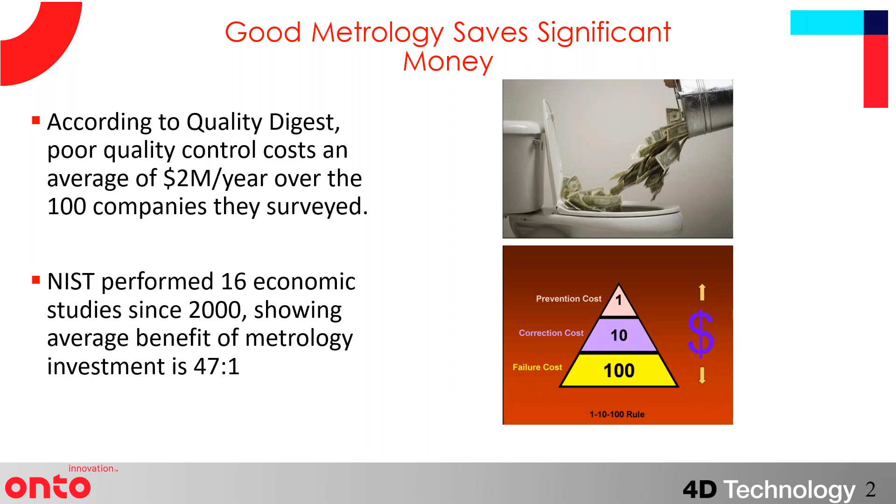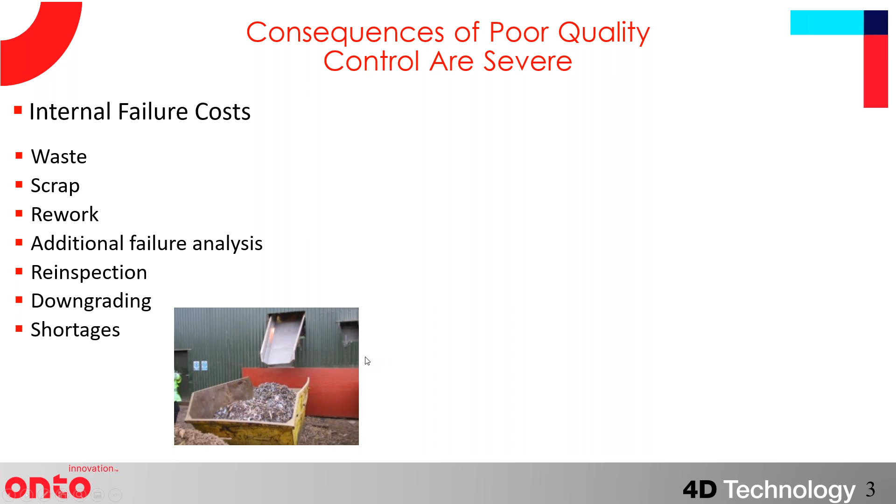So what are those costs? They fall into two main categories. One is internal failure costs, so the cost of waste, scrap, rework, failure analysis, etc., that all will slow down production, will create problems internally. But probably the more severe costs are what they call external failure costs. And those are ones associated with field failures.

So having to do repairs and service of parts under warranty, handling customer complaints or failure of customers to accept parts, travel and return time and meetings associated with discussions of failures, and ultimately maybe the most important, which is customer perception, where, if you get a bad reputation or fail to handle issues in a timely manner, that can have long-term business consequences.

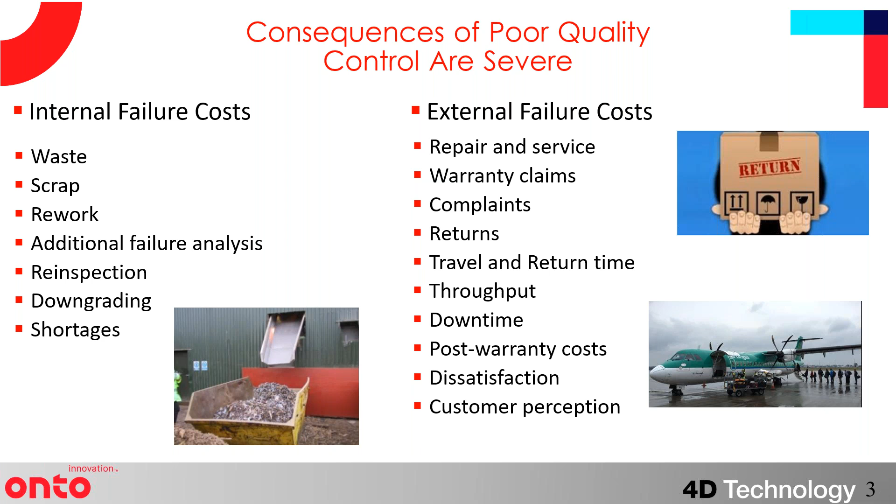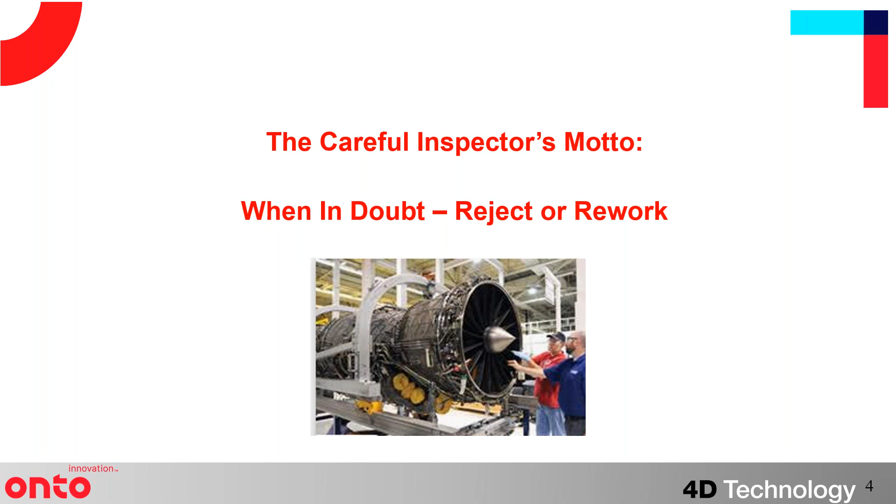And one of the challenges in aviation is, inspection and metrology is really critical. Almost every inspector out there, if there's any doubt whether a part should pass or fail, he will always reject it or put it in the rework bin, because the cost of failure is simply too high. I've heard many times from our customers and from inspectors that they think about every engine they work on and every piece of an aircraft and think, what if my mother got on that aircraft and it needs to be safe? And so that actually leads to aviation having among the highest failure rates of any precision machining industry.

And traditional techniques are just no longer sufficient to control quality. So, surprisingly, there's still a large number of calibrated eyeballs and fingernails out there that are doing measurements, essentially with one person and their judgment, but they are operator dependent and, of course, non-quantitative, non-gauge capable results. The next level of sophistication, and this is probably more common now than anything, is to use replication and then either a 2D profiler or an optical comparator to look at a cross section of a given defect or part.

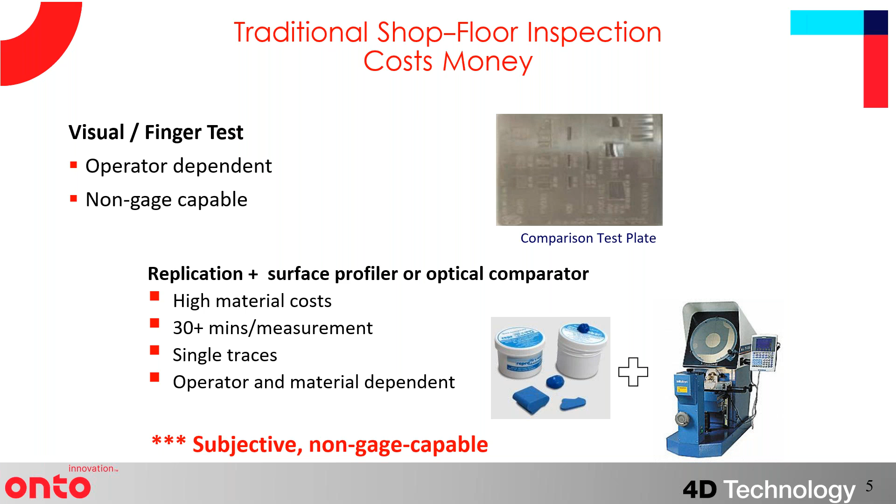The replication material is expensive. It's a time-consuming method because the replication material has to dry, be scribed, go to another instrument. But more importantly, it still lacks a lot of quantification. Did you really get the deepest part of the pit? Did the material really penetrate all of the way? And so these are very subjective, non-gauge capable methods.

On the other end of the spectrum are lab-based measurement systems. And that might be something like a 3D microscope or a high-quality stylus system. But these systems are expensive. They can't handle large aviation parts. So again, you're often relegated to needing replication.

They're difficult to use many times. And if they're in a metrology lab, that lab generally is quite busy. And it may be days before quantitative measurements come back to the shop floor.

And so our goal, and we've been working with the various people in aviation, and actually partnered in the development of this product line with General Electric, Rolls-Royce, Pratt, and others, is to bring accurate 3D surface measurements to the part on the shop floor and make quantifying a defect just as easy as taking a picture with a cell phone or a mobile. So here you can see some different examples of that.

Being an optical technique, you can actually use fold mirrors, as you see in the center of the field of view, to look inside fir tree roots. You can measure large cowlings. You can measure inside pipes or outside shafts.

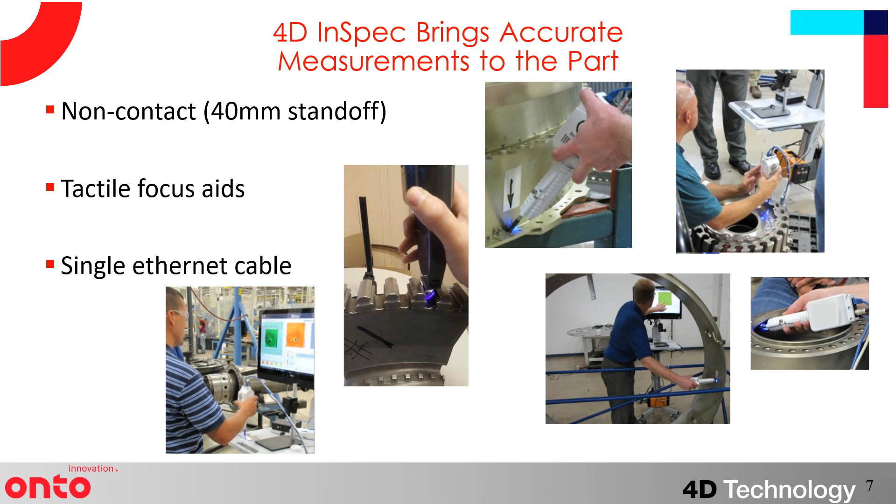Talk briefly about specifications that we came up with. We currently have two models of our handheld surface gauge. One is the standard 4D InSpec with an 8mm by 8mm field of view, 2.5 millimeters vertical range, and 3 micrometers vertical resolution. The standoff distance from a part is fixed, so the instrument will always be 35 millimeters away, or if you use a fold mirror, that combined distance between the instrument and the part will still be 35 millimeters.

The XL has nearly twice the field of view, but more than 3 times the vertical range, and just about twice the vertical resolution. So here we're talking about 8 micrometers vertical resolution, standoff distance considerably larger, but still very tight lateral sampling for both instruments. So more than sufficient to be able to quantify defects which are visually or tactilely observable.

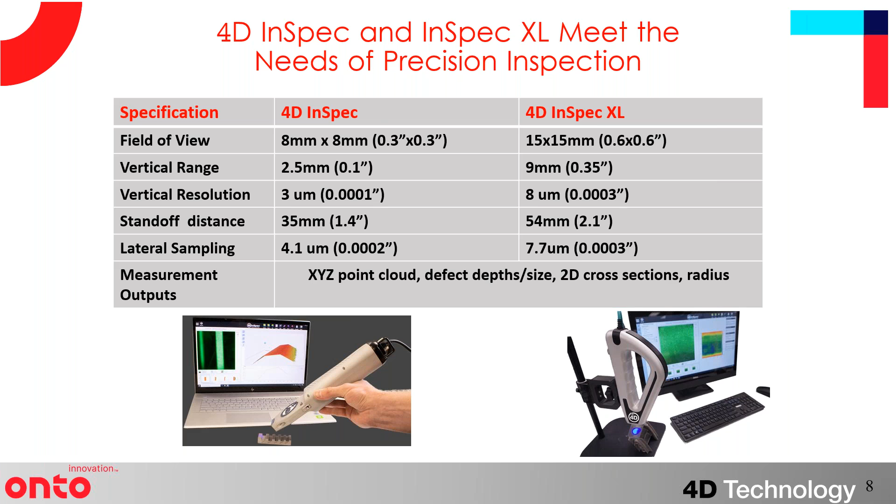And in addition to being strictly handheld, being a small unit, you can actually configure it in a variety of ways. So it can be on a benchtop workstation with a flexible arm, so you can hold it at various orientations with respect to the part under test. This would be very good for new make shops if you're doing the same measurements over and over again.

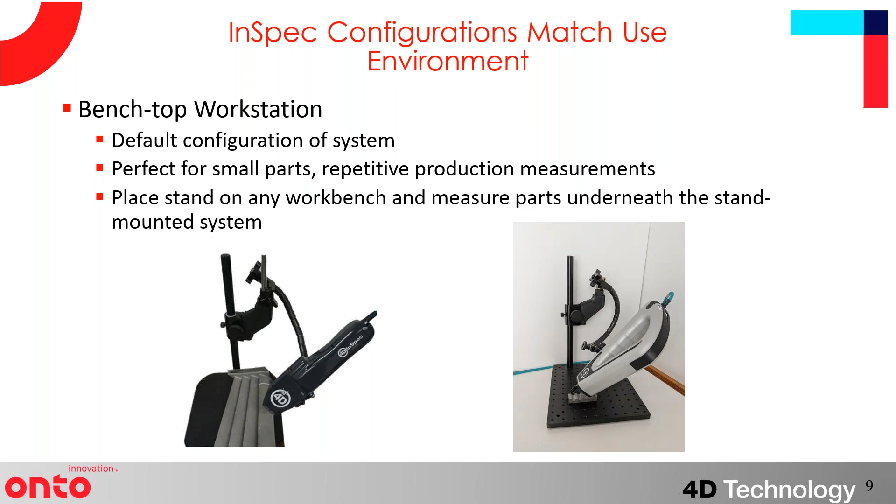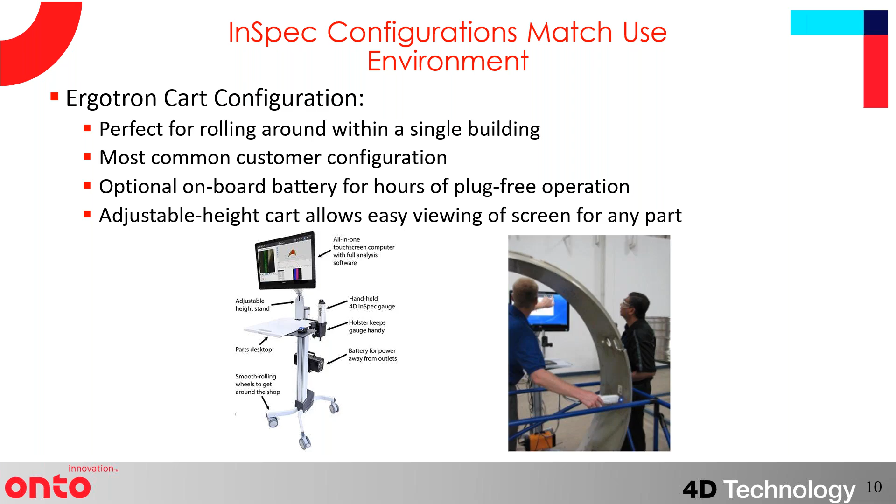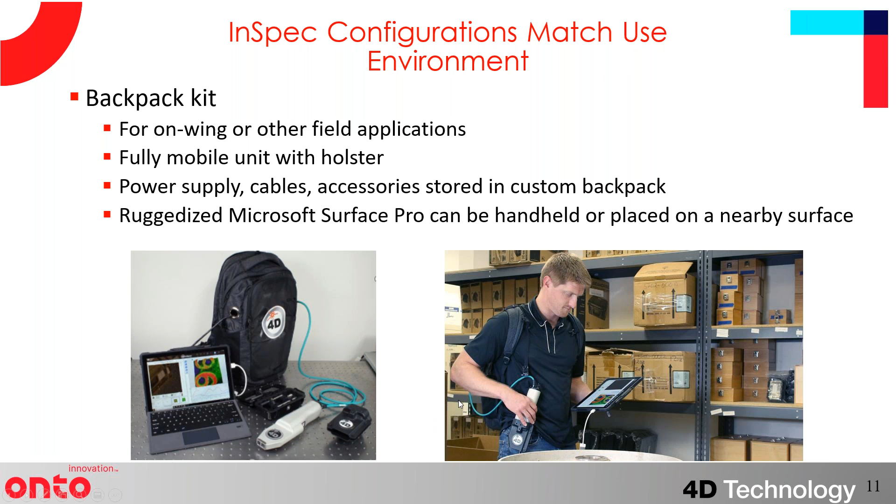You can have a mirror kit in there, and then the instrument itself will run on a ruggedized Microsoft Surface Pro running Windows 10, 64-bit, and you can take metrology wherever it needs to go very simply, and upstairs into aircraft. Even the marine people will bring this into submarines and things. And then if you're going between sites, there's another version that comes in a full travel case that makes it very easy to travel between facilities.

And we have native support within our software for Universal Robots, and then also support via a command interface structure, a remote access software, so that you can use any third-party program to control our system. So if you have your own automation, this will integrate within your factory.

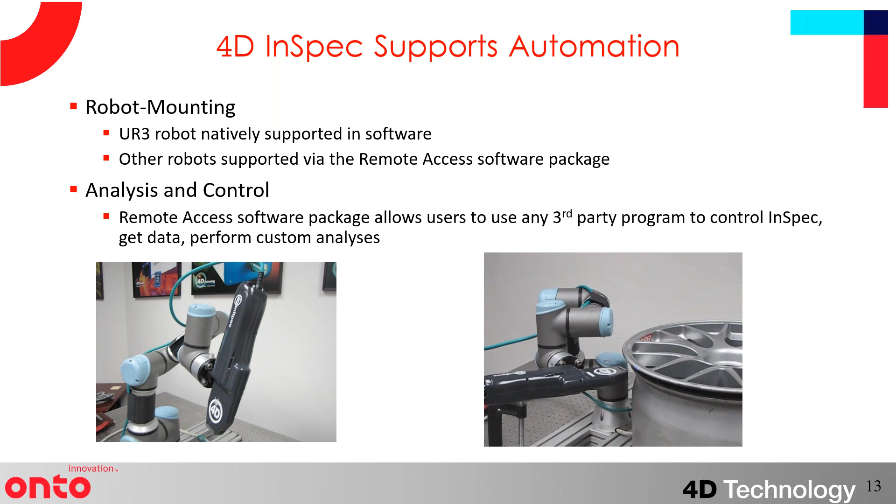An optical system is extremely insensitive to material shapes, material finishes, and material types. So our system is in use measuring carbon fiber, fiberglass and composites, plastics, metals, and anything from very rough rubber all the way to ultra finished blades. So really, the large dynamic range of cameras allows measurement of most any surface without any preparation.

Now you do have to brush dirt and debris off the surface because we are measuring what we see. And so if there's a piece of dirt, we would measure that as a high point.

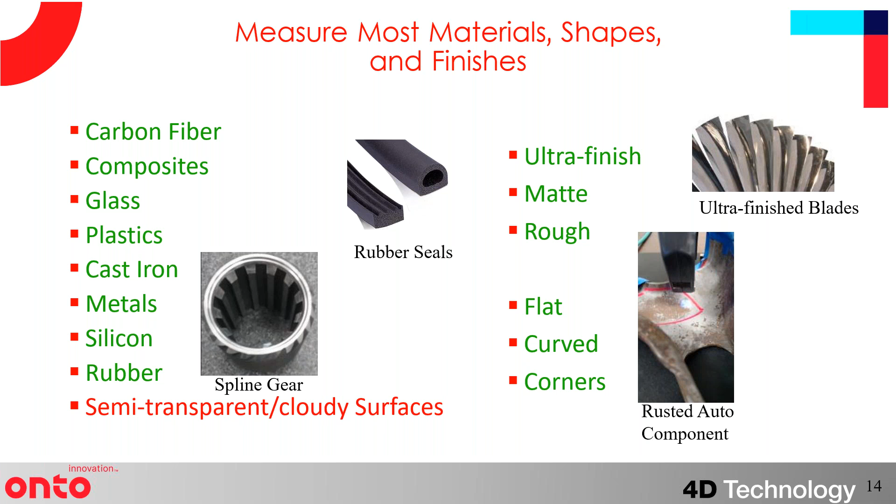And then in terms of aviation applications, it's everything from seals, turbine blades and blisks, bearings and bearing races, actual turbine blades, shafts, and then looking at everything from corrosion to rivet and fastener depth, edge break and chamfer, blend height and radius for repaired parts. And we'll give you examples of various of these later.

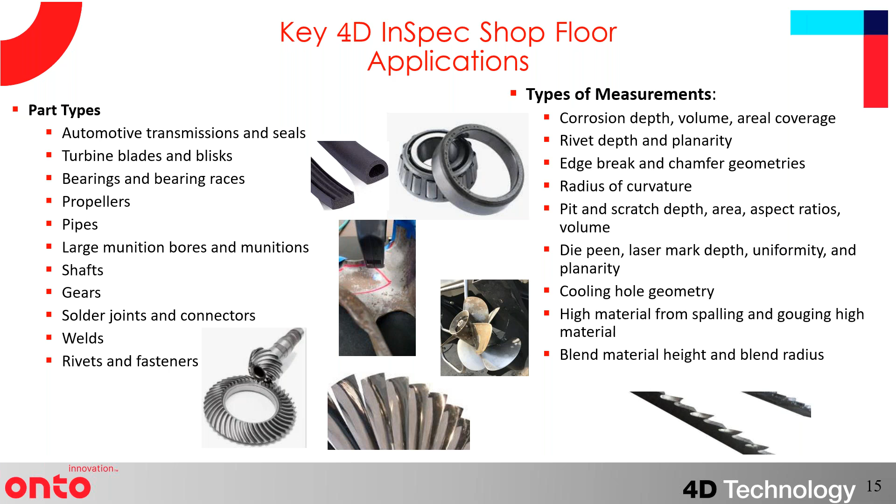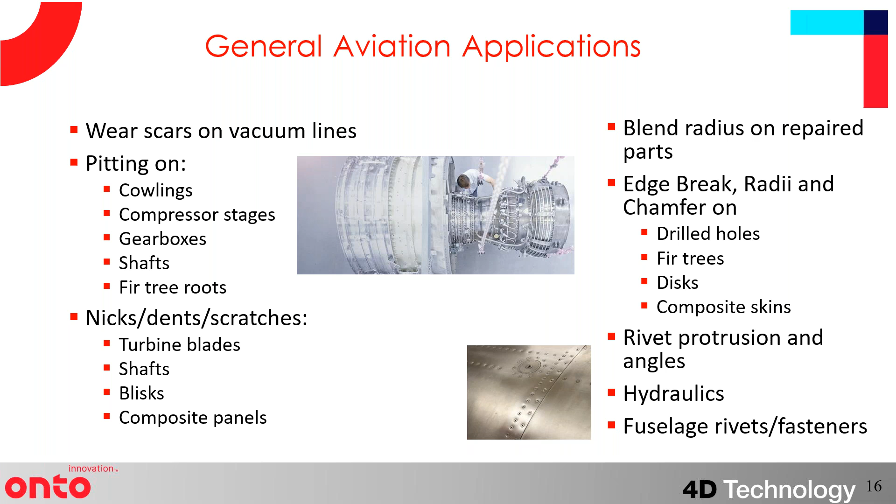Weld joints to look for cracking and look for the seam height. And then, further examples, measuring, again, almost any part, from wear scars on hydraulic and vacuum lines to measuring critical portions of gearboxes and fir tree roots. Now I'm just going to go over very briefly a few quick applications, and then we'll turn it over to Kramer to actually do some measurements and hopefully have you guys ask further questions about system use.

So, obviously a big application is corrosion pitting. The advantage of three-dimensional metrology is you can quantify all of the pits within the measurement field of view simultaneously. So in the middle, we have a false color height map where blue is low and red is high. So you see a lot of blue pits. In the upper right, we've identified every pit that is deeper than 25 micrometers deep.

And down beneath, we have a CSV exportable table that will give feature height, area, volume, percent coverage by corrosion, distance to neighbors, and density. All of those things are automatically calculated with no operator intervention.

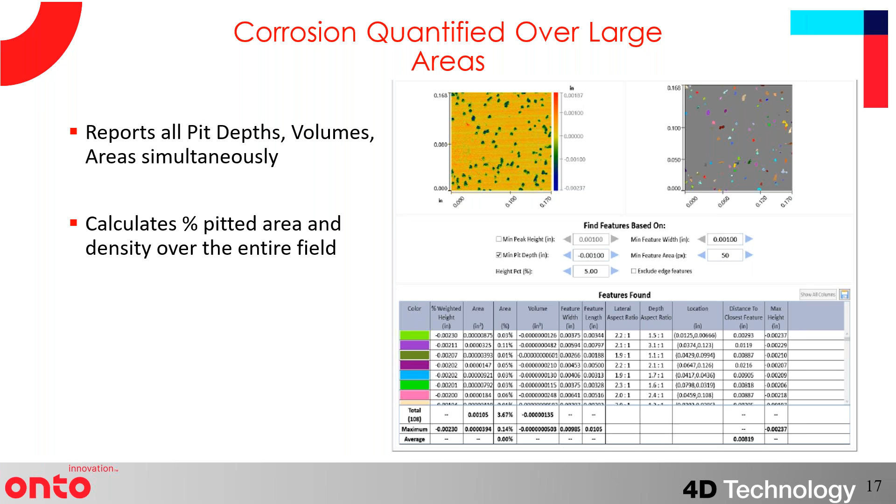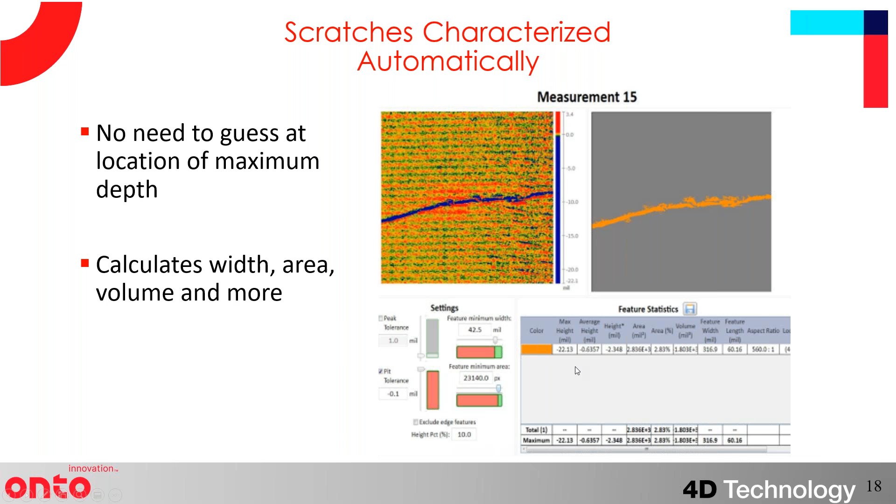And we have the capability using 3D of making measurements which are insensitive to the orientation of the part with respect to the instrument. So if your system is twisted or tilted with respect to the part, we can actually tilt more than 15 degrees in any direction and maintain accuracy to within 1%. And that's really the advantage of three-dimensional metrology as opposed to a 2D trace, which is extremely sensitive to how it's oriented on the part due to cosine errors.

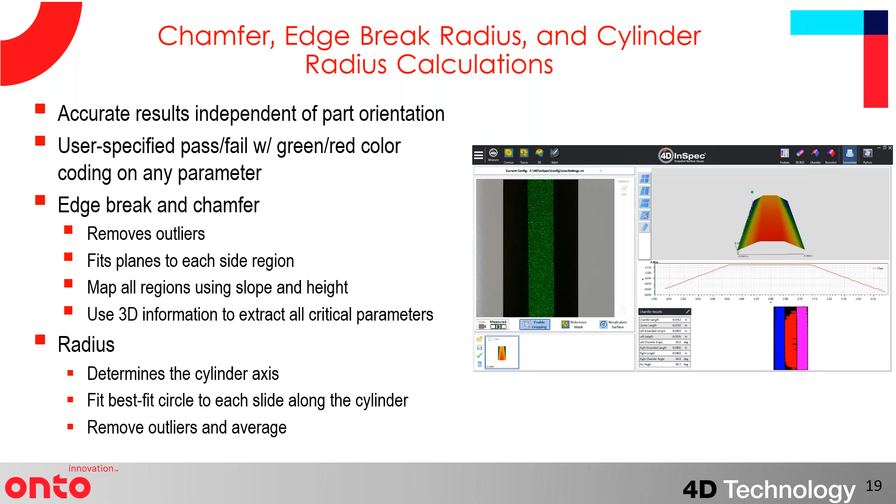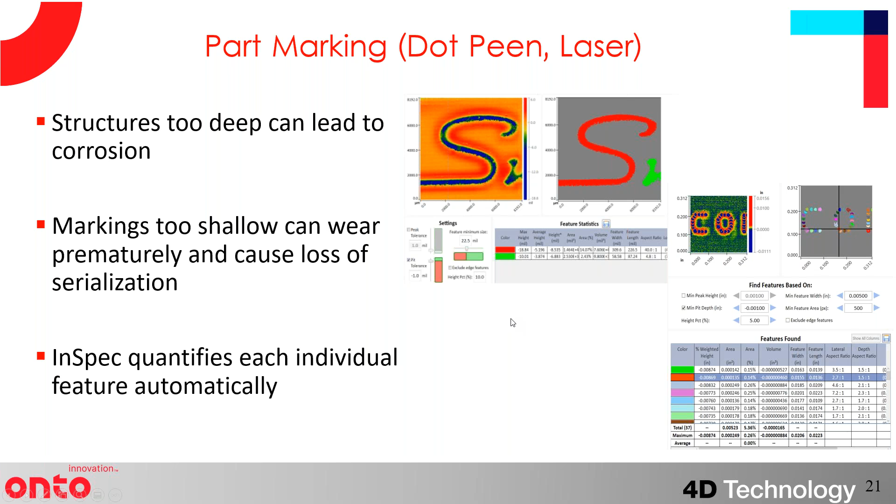Rivet depth, planarity, perpendicularity, all automatically calculated with the system. Part marking is a big application. If part marks are too deep, they can initiate cracking or corrosion. If they're too shallow, you can lose the serialization of parts and not be able to track them through their life cycle. So again, we'll find the entire feature, and in the right, you can see a dot peen. Each and every dot is identified. And again, the depths, volumes, areas are all calculated automatically.

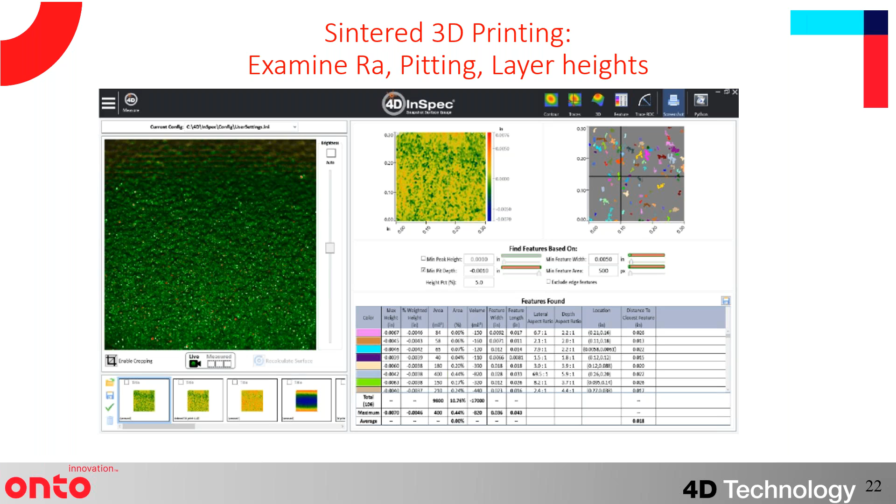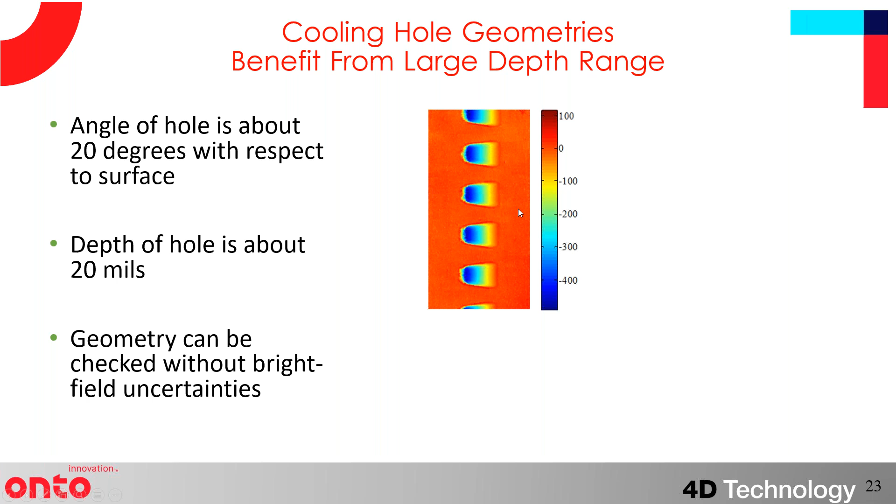3D parts can be sintered metal, as we see here, or plastic. Again, you can look for voids. You can look at surface roughness and other S parameters, which are three-dimensional surface parameters on those. Cooling hole geometries, if you need to know the angles, the volume of the cooling hole well, that can all be calculated.

And the upshot is, with simple 3D metrology, you really get an extremely rapid return on the investment in the measurement system. These are real-world examples from aviation, where we've been told that at one factory, rework rates went down by 30% on one of their most critical components because they were able to pass parts that they used to err on the side of caution and fail. Obviously, reducing measurement time on pitting is a huge benefit. To be able to quantify more than 100 corrosion pits in a single 1 second of measurement.

Yields typically have gone up, and this has been surprising both to us and some customers. A lot of people worry that more metrology means more failure. But in aviation, they're already failing parts if they're unsure whether they're good or not. So allowing an operator confidence that he can pass a part when he measures something that's 20 micrometers and the specification is 25 micrometers, he used to have to fail that because the eye can't tell that difference. But having a certified ISO qualified gauge allows you that capability.

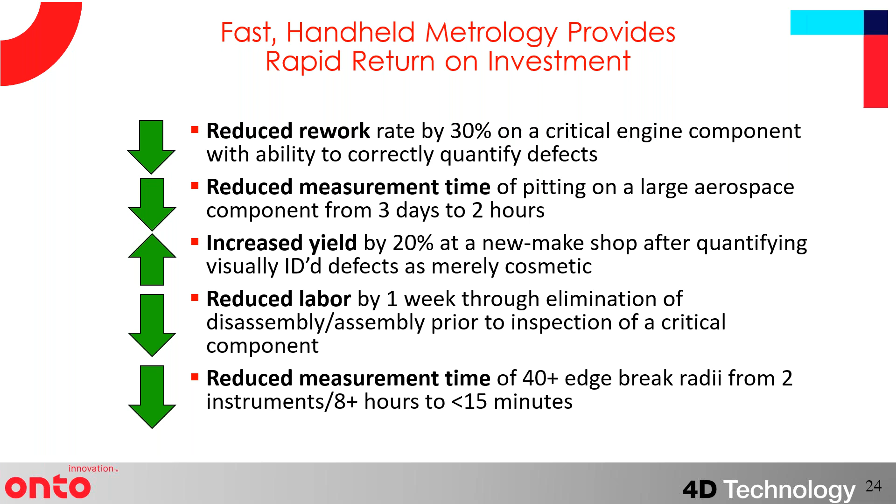And then again, reducing labor and measurement time through being able to do measurements on wing without disassembly is a big issue. So this is my last slide, and then we'll turn it over to Kramer to do some further introduction to what the system looks like and how it operates. But the goal of this instrumentation is easy handheld measurements wherever you need them.

And the system is robust. It is immune to dust. It can even handle light water spray. It is frequently dropped by customers with no ill effects. It can access small spaces, and you can use mirrors to look sideways and get into even smaller things like bolt holes. And it's really designed for use in real world applications for an average person. It does not need a sophisticated operator. Usually our customers are taking measurements within 10 minutes of us arriving on site and starting up the system.

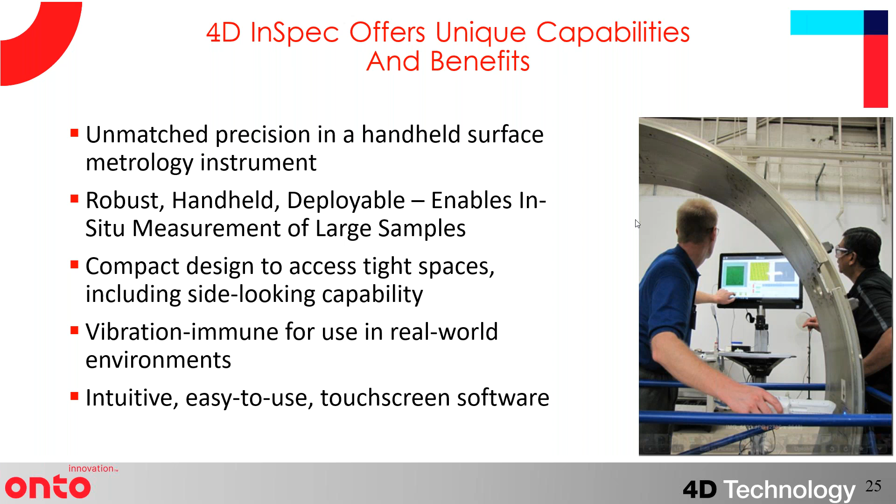All right, I'll go ahead and share my screen here so I can share my camera with all of you. Able to pass it over, Eric. There we go. Okay. All right, here's my camera to show you guys my setup.

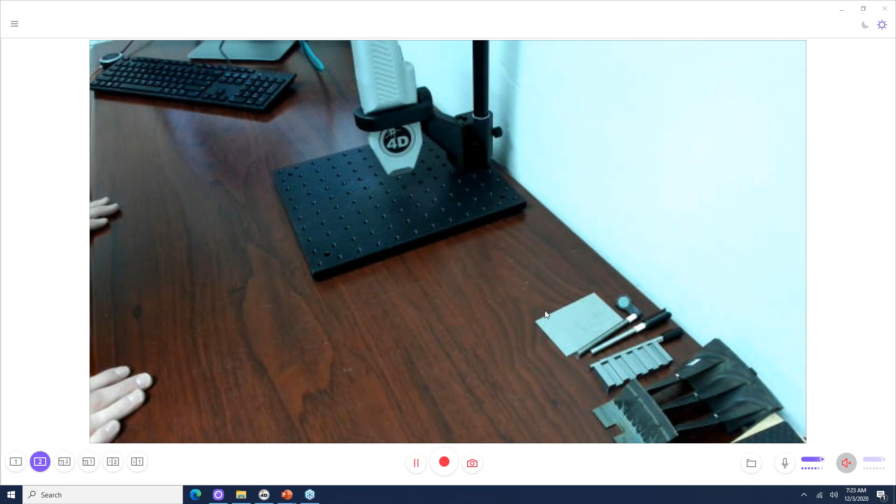This is the 4D InSpec. I have it right now currently in a desktop configuration. This allows you to put it in a microscope stand here, adjust for focus there. Allows you to put different parts underneath the InSpec, but really the real power of this instrument is the handheld 3D measurements.

To do that, we use this LED right here that is polarized in a special way that allows us to take measurements instantaneously. That allows us to get 3D measurements. To take a measurement, we can just click this button right here on the top of the InSpec whenever we are in focus.

And to get in focus while we're in handheld mode, we use a focus aid. You can put it right here in the front of this instrument. It slides right in there. That allows me to get to the right focal length on any part I put this on. So I can put it right here, and whenever I'm in focus, I can click this button and take that measurement.

So I can start with a basic measurement on a flat surface of some part marking. To do that, I just need to put the InSpec down, get to the right focus, click this button whenever I'm ready, and I'll be able to get a 3D surface map of whatever this LED reflects off of. So this LED comes down through some lenses here, reflects off a surface, back to the camera, and is able to put together a 3D surface map of the surface it's reflecting off of.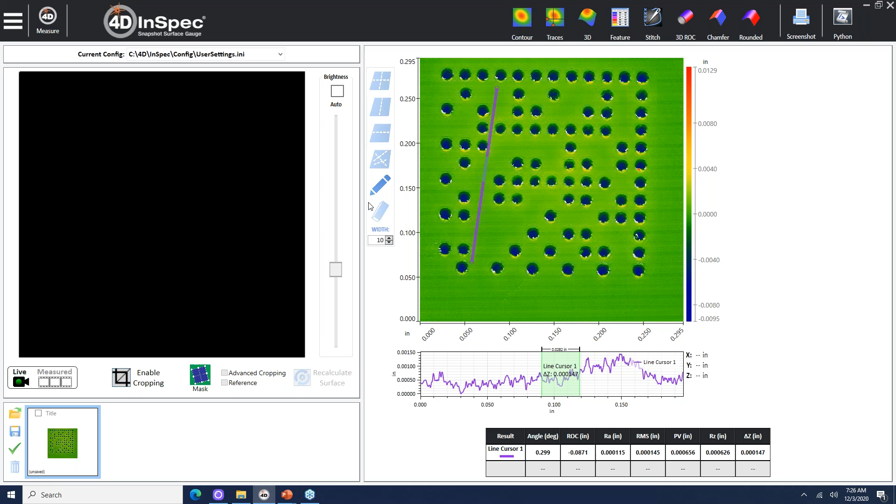There we go. We have an auto brightness feature that allows us to get to the correct brightness quickly. Any red pixels means they are overexposed. The auto brightness takes them away. So right there we have a green live video. That means we're good to go. We can click that button I was showing you guys, take a measurement pretty simply, and that gives us a 3D surface map of our surface there.

So there's a few different ways to view this measurement. If we look at a 3D map, right here, this is a traces view. Here's the 3D surface map to give you a nice little view of it. A real powerful tool we have is that feature analysis that Eric had touched on.

We can go ahead and look at any depths that are deeper than 1/1000th of an inch. So each one of these features showing up is deeper than 1/1000th of an inch. Each pit is being flagged as a feature, and every statistic you want to know about it is being called out right here. We have a weighted height, area, volume, length, width. Anything you want to know about each one of these features is being individually and simultaneously analyzed to make everything within this field of view a nice, quick, and easy analysis.

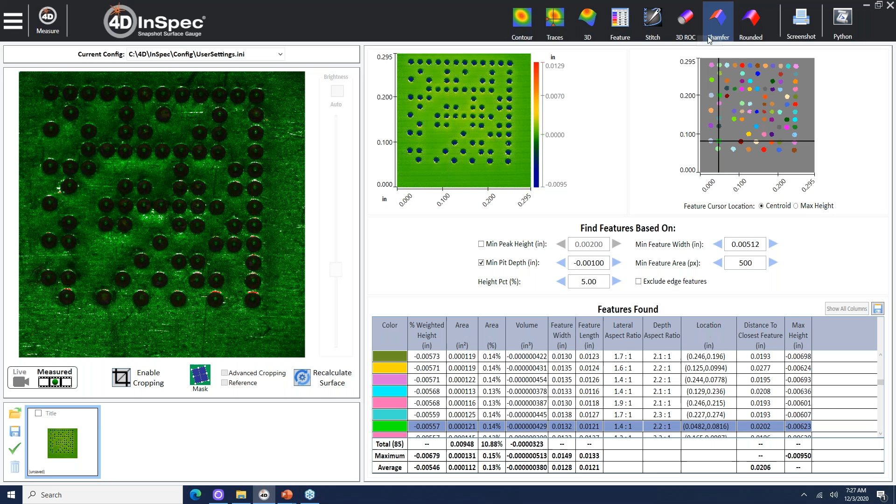We have some shape removals. I can show you what the difference would be for different shape removals. So here I was using a tilt removal, which is essentially just removing the tilt I had to the InSpec. We were pretty forgiving with how you can be tilted. You don't have to be perfectly orthogonal to the part. This is a handheld, so it's made to be pretty easy to use. So I can remove the tilt. This is what it would look like if I hadn't removed the tilt on my shape removals.

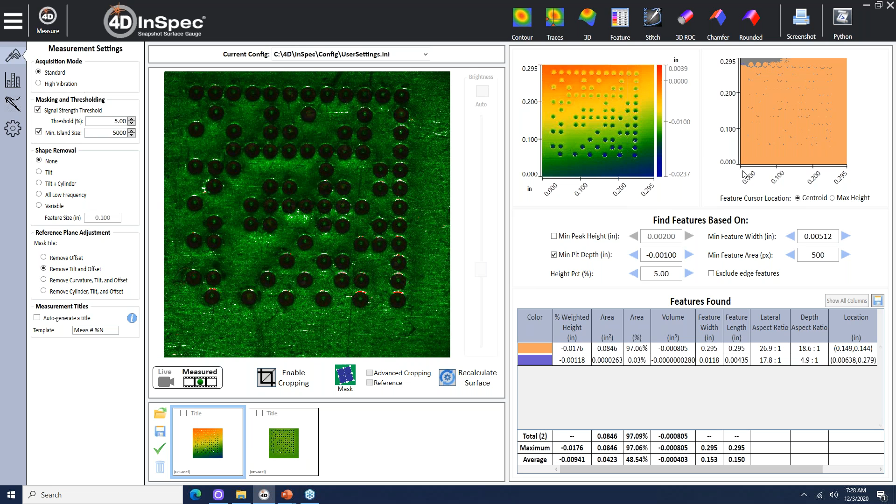So you can see I was a little closer on the top here. This prevents me from being able to get these defects to stand out amongst the tilt. So using that shape removal of tilt helps these defects stand out.

You can take measurements on curved parts as well. Different geometries don't bother us too much. This is a curved blade. You can see I have a defect here circled with a Sharpie, a little marker right there. I can take a measurement on that the same way I would take a measurement on that flat surface. I would take this InSpec, put it up to the part, let that blue LED reflect off of that area of interest right there. And when I'm ready, I'll click this button to take that measurement.

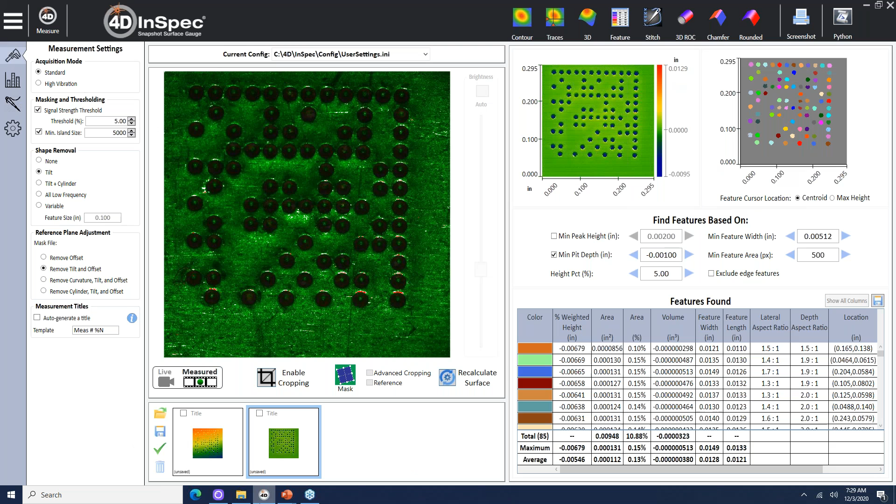So I can go back to my 4D software and show you what I'm seeing. I'll go back to my live video here, and I'll go ahead and get the auto brightness a little higher. So there's my defect right in the middle there. I can go ahead and click that button, take that measurement, and we can look at that in 3D. So here you can see what I took a measurement of there. This is my 3D surface.

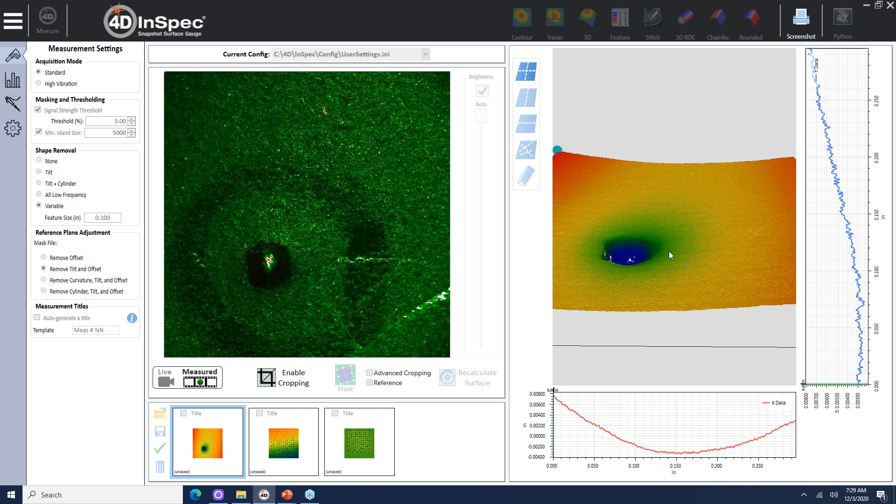I could go ahead and remove any shape that surface has. So I can remove the curvature of the part without removing the curvature of the defect. Flatten this out so that I can analyze this with our feature analysis. So this part will flatten out here as I recalculate. You're able to recalculate previous measurements here in the stack with different settings. So I changed the setting from tilt to variable shape removal. That shape removal removes the shape of the part without removing the shape of the defect.

That allows me to put this into the feature analysis that we were using, and that defect on this curved blade is analyzed for you. You don't have to guess with the 3D data where exactly the deepest part of this defect is. It could tell you exactly the point that is the deepest. You can see it's right here towards this upper left-hand side of that defect. And everything about this defect is quickly given to you in this feature analysis.

So you can quickly measure that. You can just put that InSpec up to the part, measure it, and you quickly have these results. The idea is that you can take this InSpec to the part, take that measurement, and get defect analysis results very quickly and easily. I can go ahead and show you guys different ways to measure on different geometries.

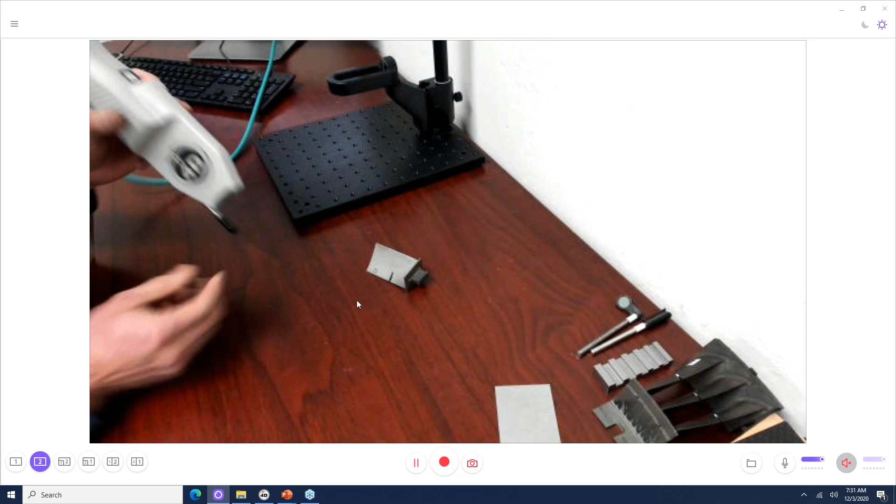So right now we are using this focus aid that allows us to put this InSpec up to different parts, whether it's flat, whether it's curved like this. This is a more universal focus aid, but we have different ones that allow us to do different types of measurements. This is more of a V groove as opposed to this rubber tip. This allows us to ride along edges of blades. We can put that into the end of the InSpec here, the same way this one works, and we can look for defects along a blade edge. So if I wanted to look at this blade edge here, I can put this V groove focus aid right here and search along this blade edge for any defects.

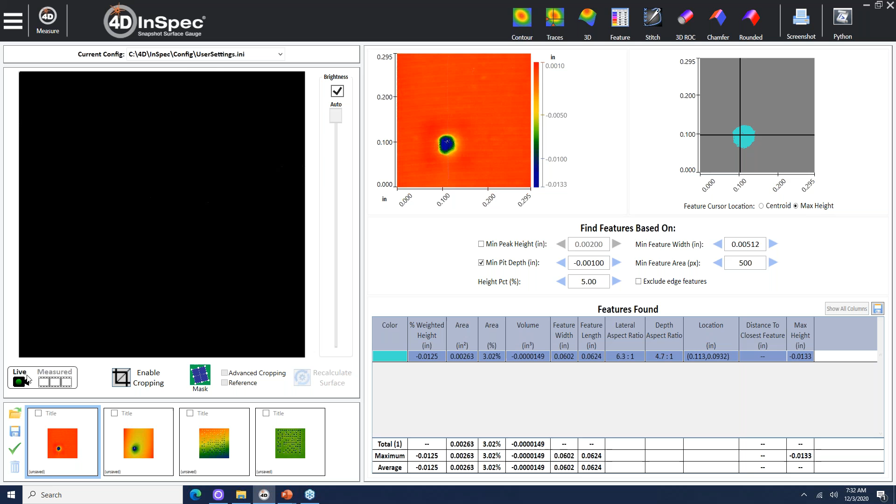So I can go back to my live video, and whenever I'm ready, I can just click this button again whenever I see that defect in my field of view. I'll go back to my live video and take a measurement when I get a defect in the field of view there. So you can see I'm focused there, and those red pixels are overexposed. So I'll bring that brightness down a little bit, and I'll take a measurement. I'll purposely be a little bit off of vertical. We have some new cropping. It allows us to be away from vertical, and we can crop that in any way we want.

Yeah, we did have a question regarding that, Kramer. Yes. Okay, yes, perfect.

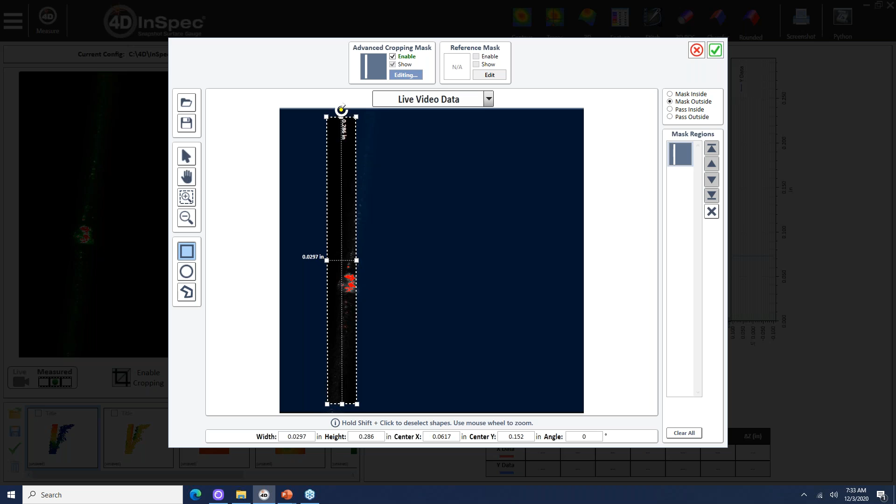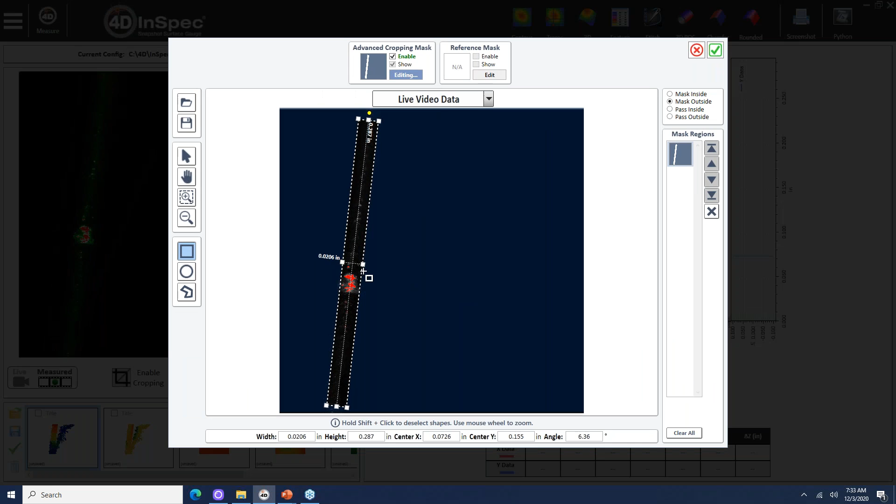So calculate that. So I will go ahead and crop this with our new cropping right here. I'm a little askew from vertical, so I can move my crop in the advanced cropping. I can adjust this to go along the axis of the blade edge right there. It might be a little more obvious if you show them the surface there. Yeah. Okay. You can do it with the live video. It's a little dark to see on this measurement, but you can see the general direction on the surface data here. I'm going along the axis of the blade edge there. I'll recalculate that surface with this new crop in the advanced cropping here.

And I'll get this nice edge of the blade right there. Now I can draw my own trace. I can analyze this in this traces view. I can draw my own trace across here, like so. And I can move this trace around until I find the deepest part, which is more towards this left side. And when I have that, I can drag over from this left side some highlights, some calipers, and

I can see the width of this, about 28 thousandths of an inch, and I get a peak to valley, which would be the highest to the lowest point, the difference of those 2 points. So I'm about a 4 thou, almost 5 thou deep on this pit. So blade edge nicks can be analyzed with this traces analysis.

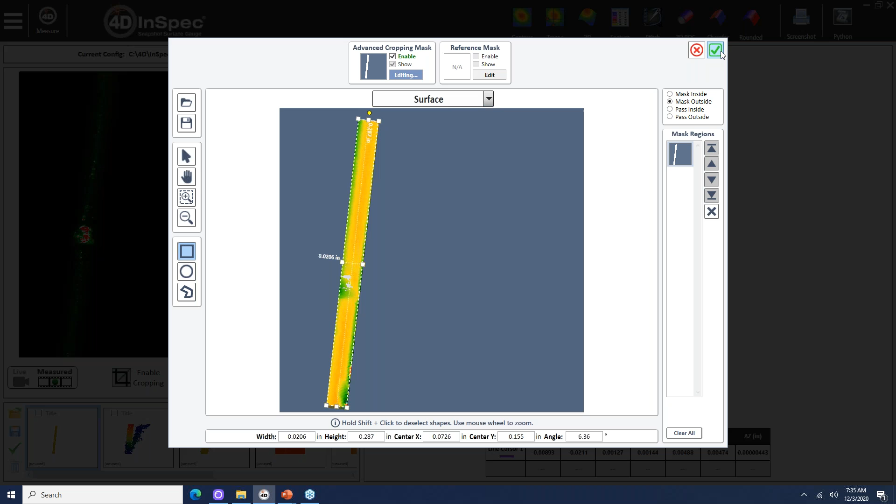We don't have to be vertical like we used to be with our measurement. Alignment doesn't matter because this new advanced cropping mask can be rotated in any direction you want it to be. You can rotate it so that we don't have to be exactly perfect up and down when you're aligning your measurement. So that's a nice little tool that's new to us and pretty useful in this case. All right.

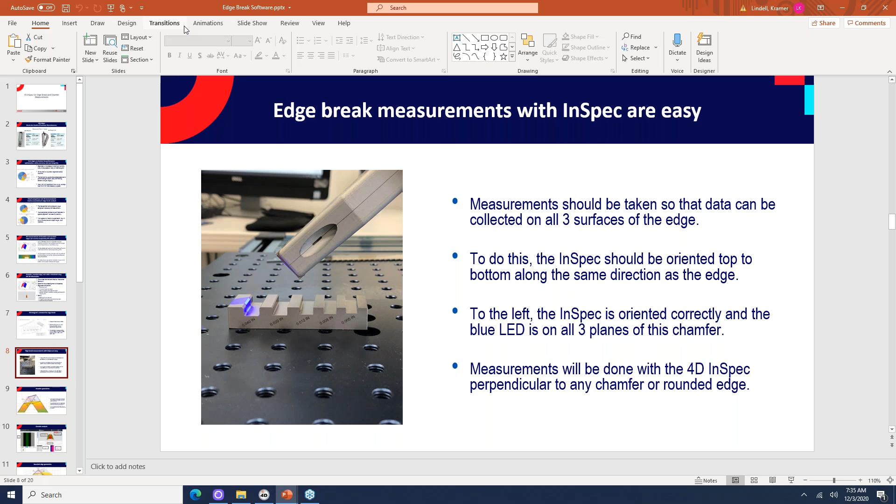So we can get a little bit into some new things we are doing. Right now we're being used for that defect analysis that I've been showing you, and we are starting to do a little bit of this edge break analysis. So for edge break testing, we made this edge break standard. I can get you a better close up probably in this page right here. And so this is the edge break standard here.

Right here on this side is a chamfer. That's what's currently being measured by the InSpec. It's just a broken edge that has a machined flat right here. So we have 3 planes, and the InSpec is measuring perpendicular to the chamfer face so that it can get data off all 3 of these planes. That allows us to identify what plane belongs where, and we can reconstruct the material that has been removed.

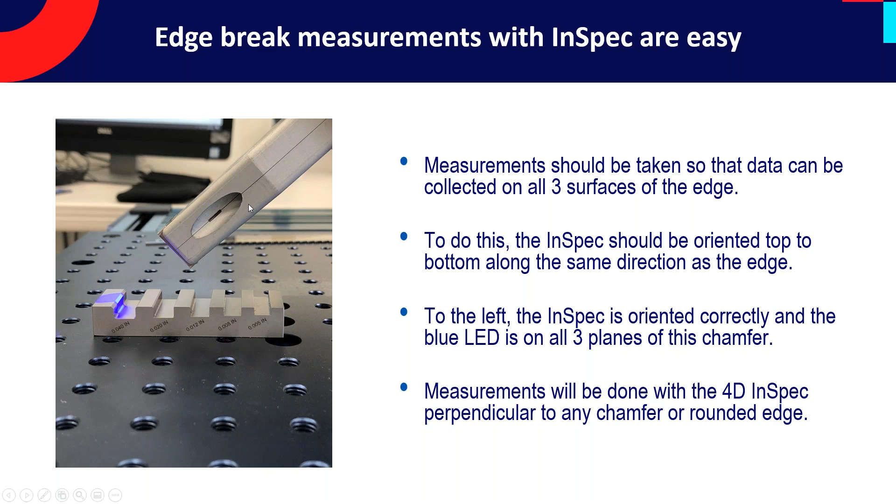On this edge, we have a rounded edge that kind of works a similar way. We can identify the 2 planes that are adjacent to this curved area, and I can take some measurements off both of these and show you how our edge break analysis works. So I'll go ahead and put our universal focus aid back in and take some measurements on this edge break standard. So again, I'm just going to put up the InSpec to the

part. Everything this LED reflects off of, we can get a 3D surface map of. So we'll get a 3D surface map of this edge break geometry right here, and our analysis software can reconstruct the edge and tell us all the data we want to know about this chamfer. So back to our 4D software here. I'll get this in focus, put the auto brightness on, and get that to where I want it to be, which is about right there.

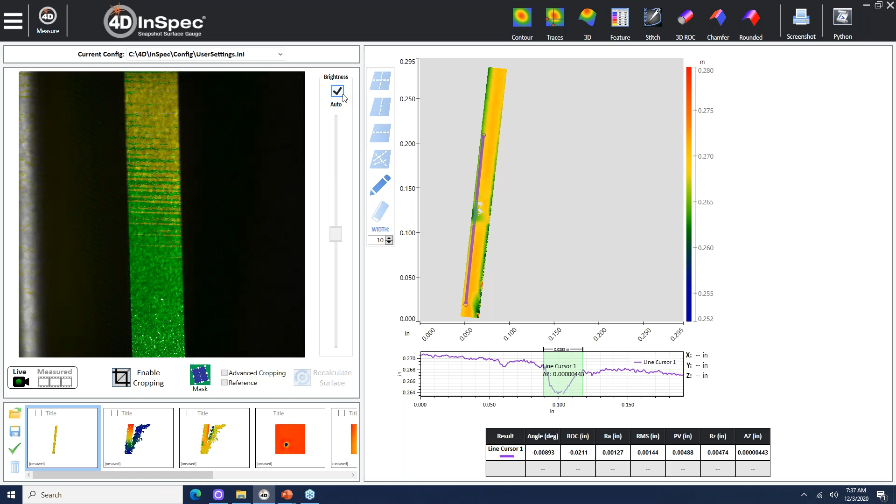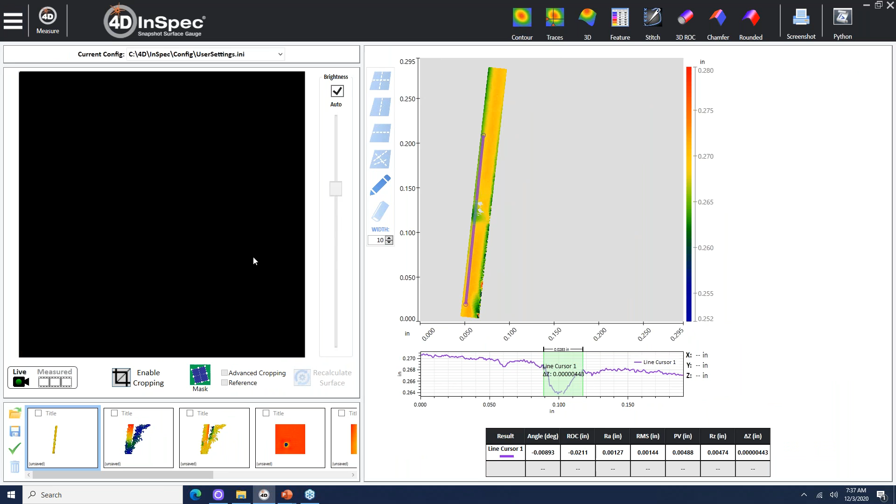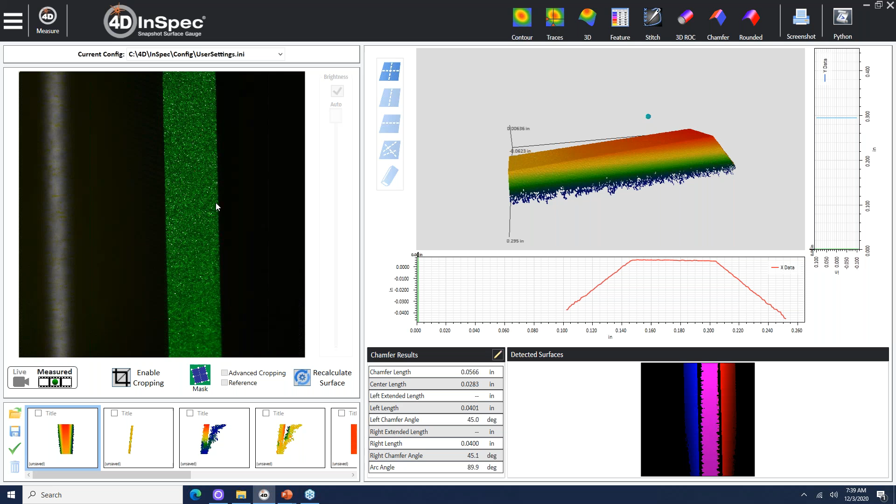With that 3D data, we're able to remove any of that tilt. You can see this top side is a little closer to the InSpec than this bottom side. You can see I'm a little bit off center, a little askew on my alignment there. I didn't do a perfect job, but with that 3D data, it doesn't have to be perfect with the alignment. So the 3D data can remove any tilt and get you some accurate chamfer results.

So there are a lot of results here. It might be easy to refer to this diagram. So we're displaying this chamfer length, which is what's commonly measured, sometimes with 2D measurements. We're reconstructing this right length where these two planes would intersect. This is what that right length would be. Same with the left length. And then there's a bunch of angles in between that we are displaying as well.

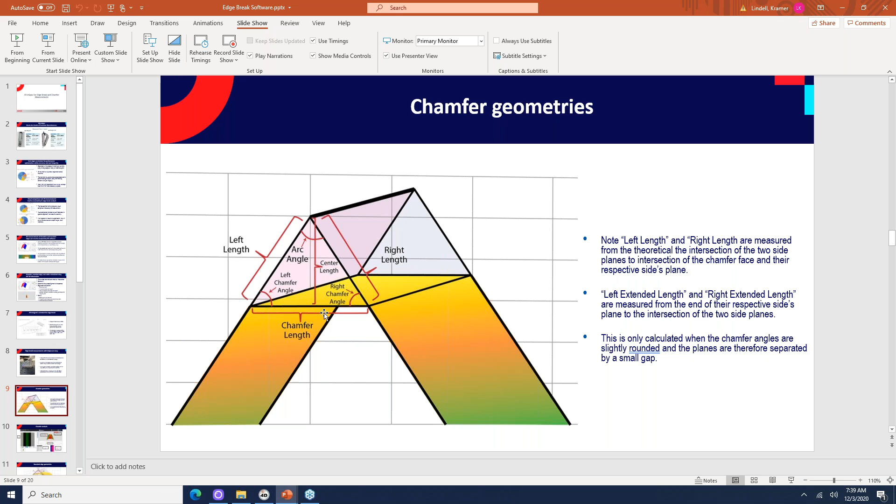So I could do something similar for a rounded edge. The other side of this standard has rounded edges. I can go ahead and take a measurement the same way I would for the chamfer. I can put the LED on that side, click that button when I'm in focus. Go back to my live video here and get a good measurement of that rounded edge. All right.

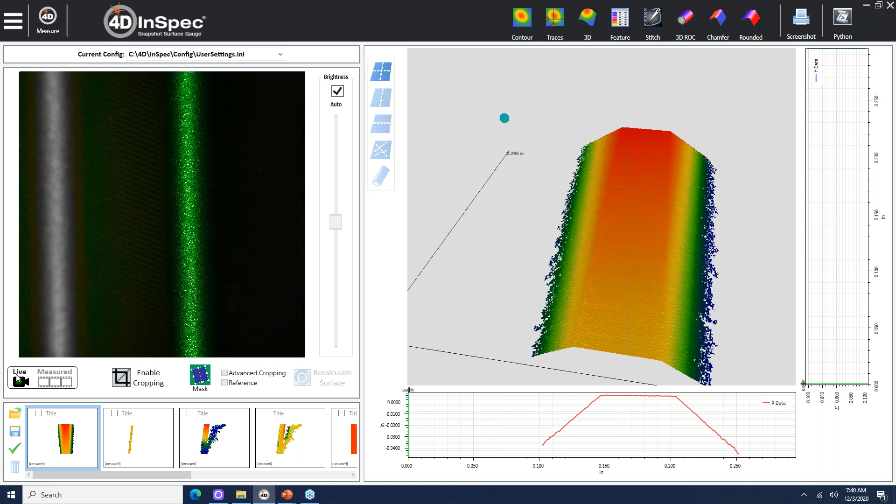All right, so there's my rounded edge. So the software is going to identify the data points that belong to this left plane, data points that belong to that right plane, identify where that plane stops, and tell you where that curved area in between is. That's what this pink banding is. And fit a best fit circle to that. This is certified to 40,000ths of an inch, so you can see we're getting just about that.

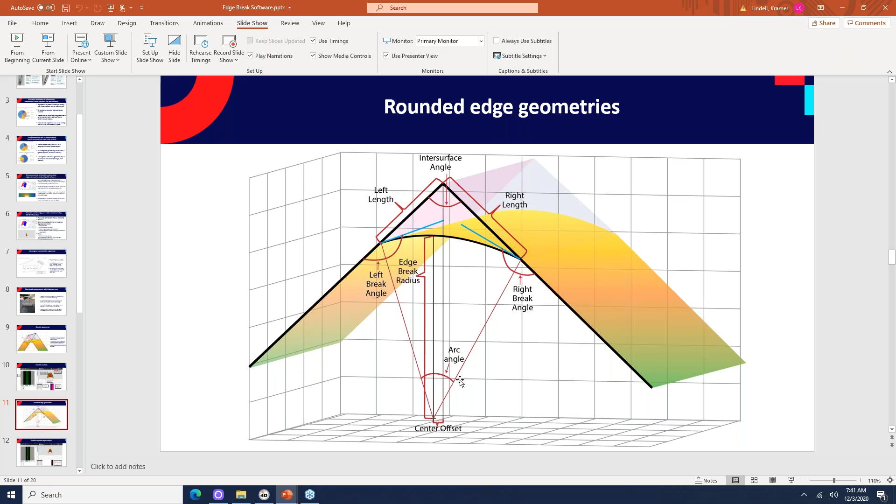And again, we are telling you a lot more about the rounded edge as well. We're telling you this right length as well, this left length. This is the radius, the edge break radius of that best fit circle. The different intersurface angles, arc angles, everything you would want to know about this rounded edge we're displaying for you here, and each one of these parameters can be set as a pass-fail parameter.

So if you had a certain spec, say something like that, it would show up green. You can make it fail. I can make it fail for you if you want to see what that looks like. And that would fail for you. So if you have certain specs for each of these, you can set those up as pass-fail parameters, and it would flag each one that passes, each one that fails, to make things easy during analysis.

So it makes these edge break... We're often asked what is the range of capability of the system. So about the smallest edge break radius that we've seen specified is 75 micrometers, and we're fully capable there. And then we can actually measure edge break radii up to many millimeters in radius as well.

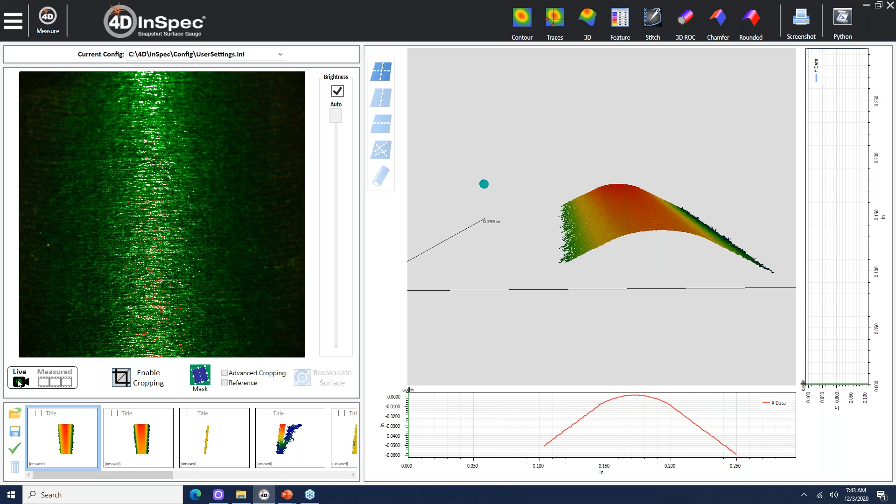All right. So we can also take a measurement on just a cylinder. That's the last part of our edge break analysis software. Makes things easy for measuring radiuses of cylinders. Back to my live video, take a measurement on a cylinder real quick. And I'll get a nice measurement of the cylinder. There we go. And this will be using the same concept as the others.

There's my cylinder, put that in the 3D radius of curvature. And this will give you just a simple output of what that radius is right here. It's about what we would expect. That's what we get for this cylinder. And you can also, in traces, highlight, I'll get rid of this, highlight the radius and get the radius of curvature right here.

So there's a couple ways to find your radius of curvature if you're interested in finding that on any parts you're looking for. So in addition to defect analysis, we can also measure small geometries like edge break, chamfer, rounded edges and radiuses of cylinders.

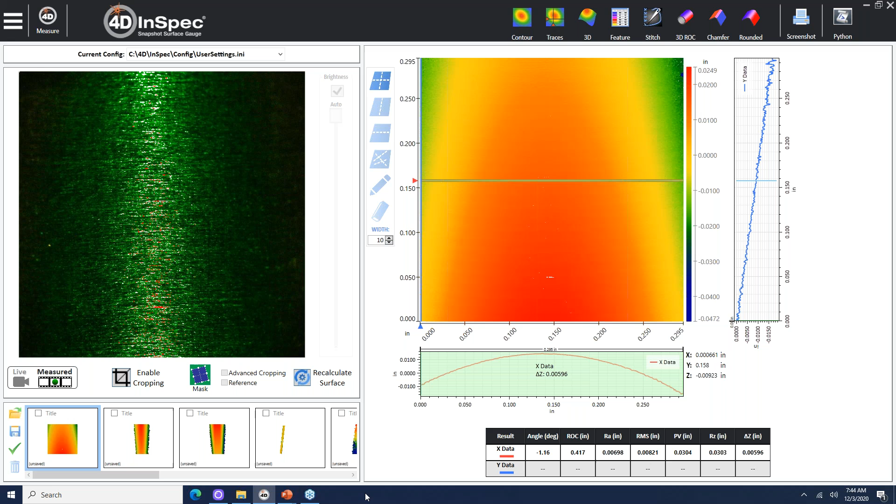So I have a few parts here. I can show you some different measurements. We can go through some calibration. We can do some measurements with a fold mirror. This allows you to get in between different, say we want to get inside these blades, we can do that. I can kind of open it up for any requests. We have a few different parts here. But I can go ahead and do a quick calibration. Everyone likes to see the calibration process, which is fairly simple, fairly quick. So I'll go ahead and do that in the meantime.

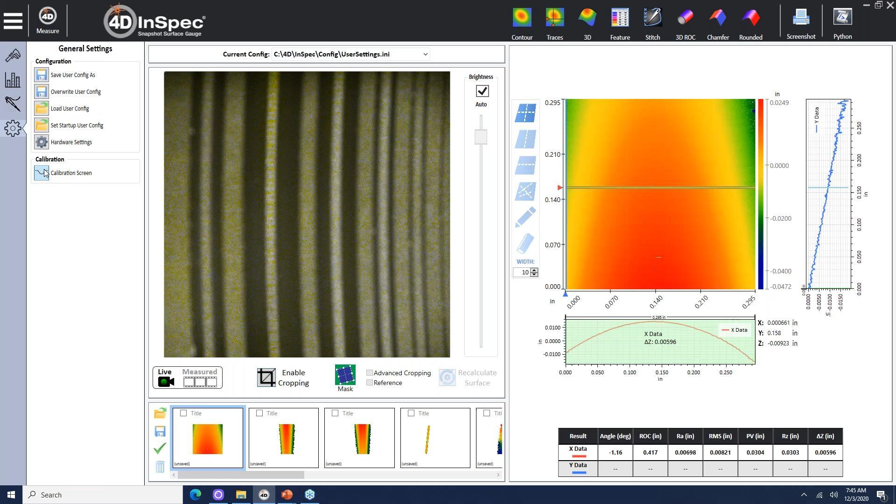All right, so the calibration process is really just setting this standard down onto the microscope stand, getting it into focus, just moving this up and down until it's green. So right there, I'll be out of focus. I move that back down, I'll get into focus. I open the calibration screen, which is just in settings. And then I can align these ridges to the red overlay.

And then I can go ahead and just take a measurement, and it will compare the heights that it measures to that certified height. It displays what the certified height is and what I'm measuring and my percent errors versus that. And it'll just tell me that my calibration is verified, ensures that I'm measuring correct depths in correct places. And every time I calibrate this instrument, it goes into a calibration log.

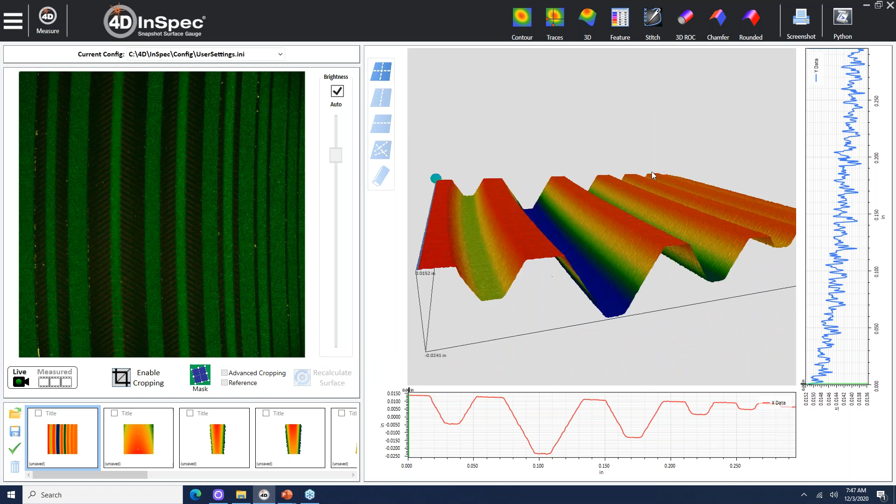And I can look at the record of every time this instrument was calibrated and what those measured heights were over time. So it's a very simple process. Takes me about 30 seconds. Pretty simple, pretty easy to do. We can look at the 3D measurement just to get a better understanding of the surface map that it's putting out. So that surface of that calibration standard.

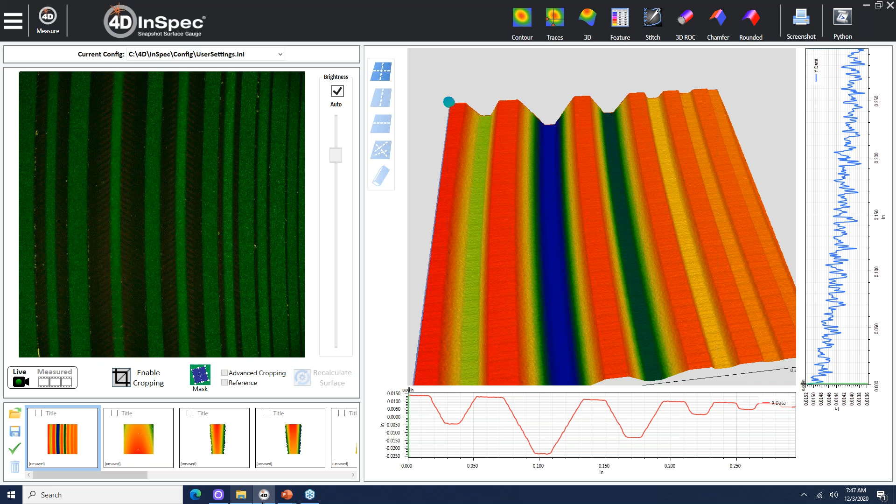Hey, Kramer. Yes, sir. I had heard you guys talk about the auto brightness changes, and this is actually the first time I've seen that working. Oh, okay, yes. Could you talk about how that works and also the usefulness? Yeah, absolutely. I'll go ahead and go to a sample that has a kind of a dark rubber and a bright metallic surface. I'll go ahead and pull this back out. Put my standard away real quick, back in this safe box. But I'll go ahead and take some measurements on this dark and bright sample.

So I'm just going to go back and forth between this dark spot and this bright spot. So this is very reflective, very bright, gives the camera back a lot of light. And this is very absorbent to light. It doesn't give back a whole lot to the camera. And the auto brightness will be able to adjust the exposure time on both of these samples very quickly. And we can go and see what that looks like.

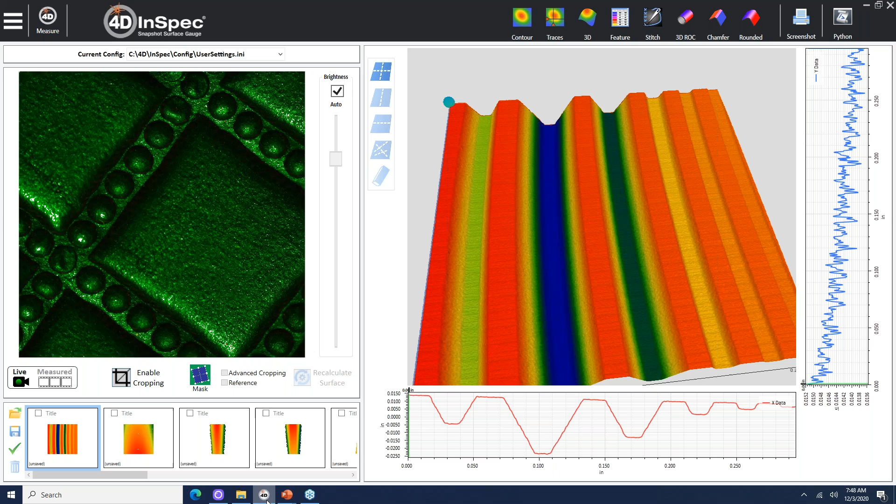I'll get in focus first, like so. Okay. And just to show you how I'm getting that in focus, I am just moving this. This is adjustable. I can pull this in and out. And once I'm at the right focal distance, I can put that down anywhere. It's going to be in focus. And then I can go back to my software there.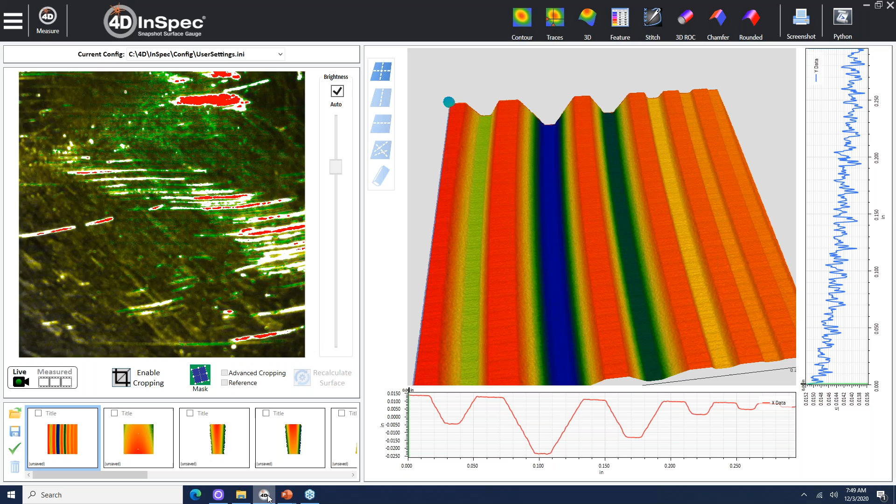So here my auto brightness is working. I can move it to the bright spot, and very quickly, like you can't even really tell that I moved to the metallic surface there. But then I can move back. The auto brightness moves, and then back to the metallic surface. And before, when you go back from the black surface, you'd have to wait maybe, I don't know, 10 to 20 seconds for the field of view not to be completely red. But it's almost instantaneous now. I'll try to make it fail, but I can't. But yeah, it's a good new feature we have. Pretty instantaneous, that exposure time being adjusted in real time.

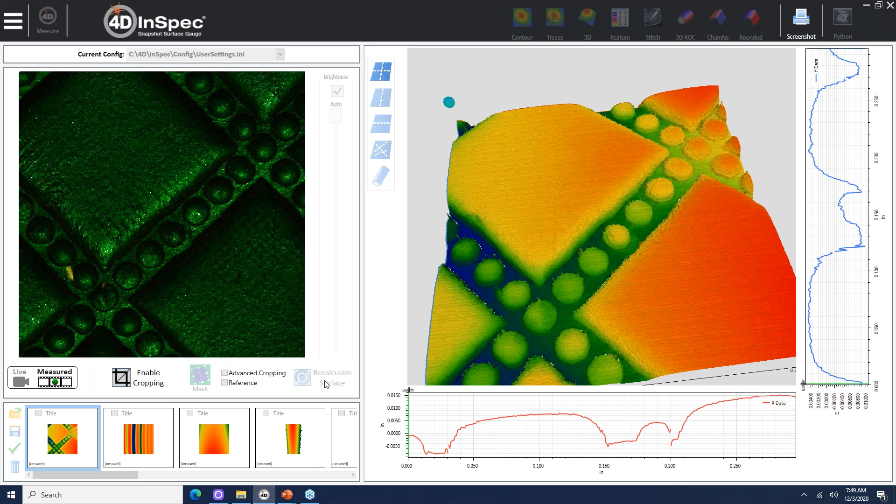And one of the other things for existing users, it used to be that there were some samples that were simply too bright for the instrument, and so you would have to really struggle to measure. The new auto brightness changes not just gain on the camera, but exposure time, so that we have a much larger dynamic range. Essentially, there shouldn't be a part anymore that's too bright for the instrument to measure.

Reminds me, the option for highest points. So you're breaking up for me there, Edgar. Sorry, this part reminded me of the plot options for selecting the highest points. In the feature analysis. Yeah, in the feature analysis, yeah. Yeah, that new addition. So go back and move this out of the way real quick.